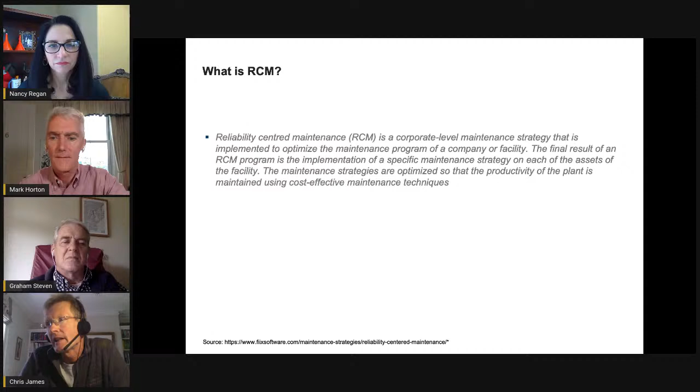This is something I got, not from the standard, but from Google. When I typed in 'what is reliability-centered maintenance,' this came up very high on the list, and I shall read it to you now. Reliability-centered maintenance is a corporate level maintenance strategy that is implemented to optimize the maintenance program of a company or facility. The final result of an RCM program is the implementation of a specific maintenance strategy on each of the assets of the facility. The maintenance strategies are optimized so that the productivity of the plant is maintained using cost-effective maintenance techniques.

Now, I would actually have a problem with that, because in my view, anybody that reads that statement would be forgiven for thinking that RCM is just about maintenance, because it seems to just talk about maintenance. The point I'd like to make in this session is that RCM, of course, it is about maintenance, but it's about more than maintenance. It's not just about maintenance. And if you just look at it as a program for deciding what maintenance to do, you're missing a whole load of things.

So I'm going to start with a bit of theory from the late, great John Moubray, and then I'm going to go on to a few examples, and I'm sure other members of the committee will have lots of other examples they will add as well.

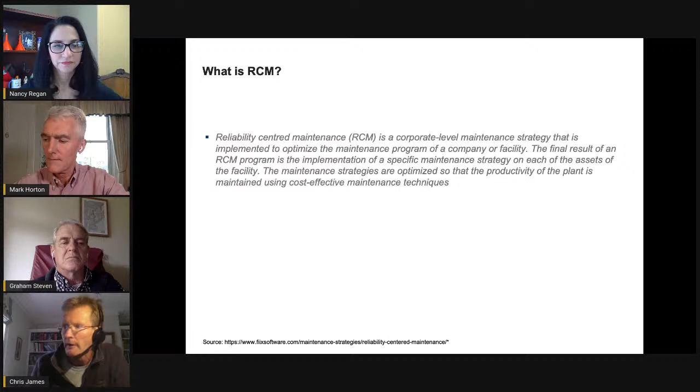Moubray tells us that any asset has two standards of performance: what the asset can do, its initial capability, and what we want the asset to do, its desired performance. Maintenance can only raise the performance of the asset up to its initial capability. So if you've got an asset for which the want is above the can, it will be in a failed state, and maintenance will often have to pick up the pieces to deal with those failures. But fundamentally, no amount of maintenance is going to increase the performance of the asset beyond what it was initially capable of doing.

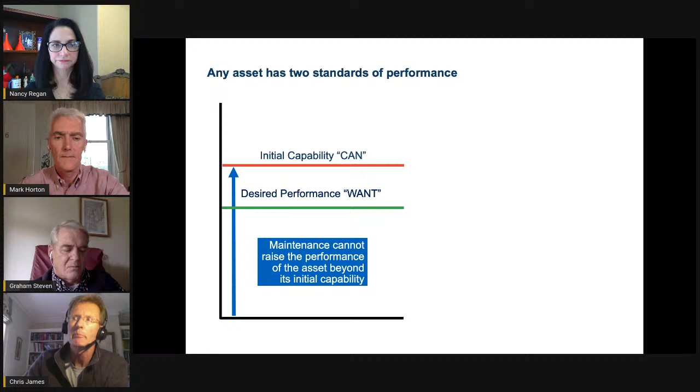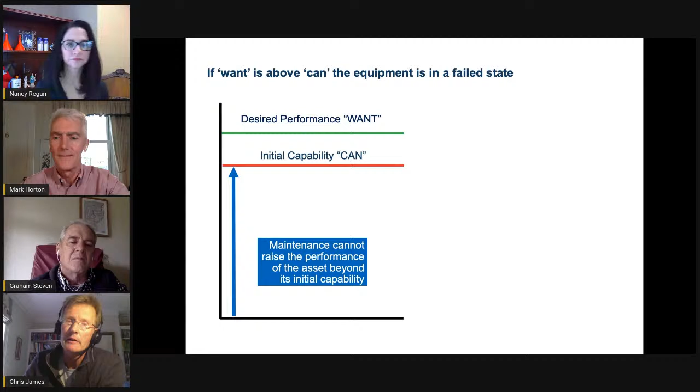So the definition of a failed state is when the want is above the can, when the desired performance is above the initial capability. It's a very simple model, actually a little bit embarrassing, a little bit insulting that you come along and listen to me tell you something this blatantly obvious. But it's actually a very powerful model because it's a good way of understanding and considering the different ways that things can get into a failed state.

A few more points I'd like to make about this model: there's a lot of pressure pushing the cans down. Moubray said you should have a gap between the can and the want, which he called the zone of maintainability. There's a lot of pressure pushing the can down, particularly at the design stage. Everybody wants to save some money, everybody's under great pressure of time, everybody wants to value engineer, don't they? Consequently, quite often the capability of the equipment in lots of different ways is being pushed down.

And there's also a lot of pressure pushing the want up, particularly later on during operations—we always want a little bit more from the asset. We're not just talking about absolute performance of an asset; we may be talking about things like accuracy or tolerances or the environment in which the equipment operates. But often we want more, don't we? And operations want more.

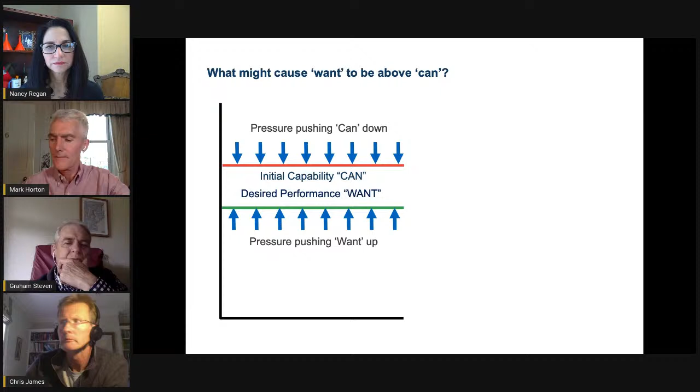Another point to bear in mind is that we're not just talking about performance standards in terms of absolute performance of the whole asset. We've got cans and wants all over the place—for the asset as a whole, for systems and subsystems and components in the equipment as well. And we've got it for all sorts of different parameters depending on the context: it could be absolute performance, or tolerances, or the environment in which something operates.

If you think about how equipment comes into being, the design process—quite often designers do a very good job, but even at the design stage, things are sometimes a bit suboptimal. Everybody is under great pressure to do things quickly, to get their job done and move on, and to save time and cost. Often things aren't well communicated—you've got different entities, different organizations doing different parts of the design process, not always well communicated, not always well documented, and of course things can change.

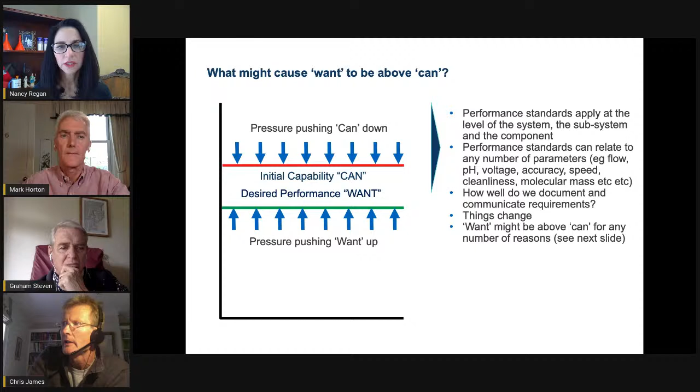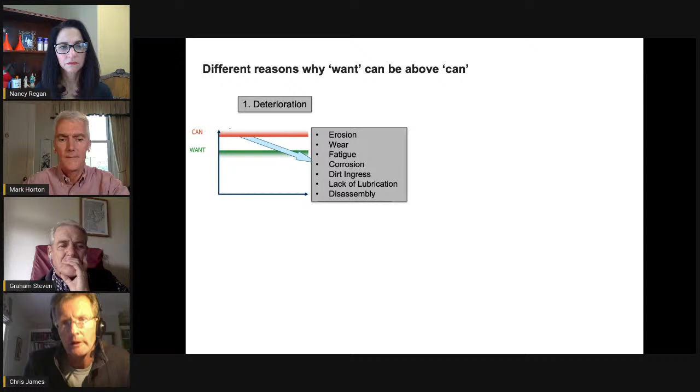If we think about it in these terms, you can understand the different ways that something can get into a failed state. There are perhaps four categories of reasons why want can be above can, why equipment can be in a failed state. The first category would be the well-known mechanisms of deterioration—things like erosion, fatigue, corrosion, lack of lubrication, build-up of dirt or disassembly—things that cause the capability of an asset to fall below what we want it to do, which causes it to be in a failed state.

But that is not all, because things can also change, and we might want more from the asset, or want it to work more accurately or in a different environment—in other words, situations in which the want can rise above the can. Maybe this happens deliberately—we deliberately push the equipment beyond what it was originally intended to do—or maybe it happens unintentionally at times, we don't really realize, or maybe conditions simply change.

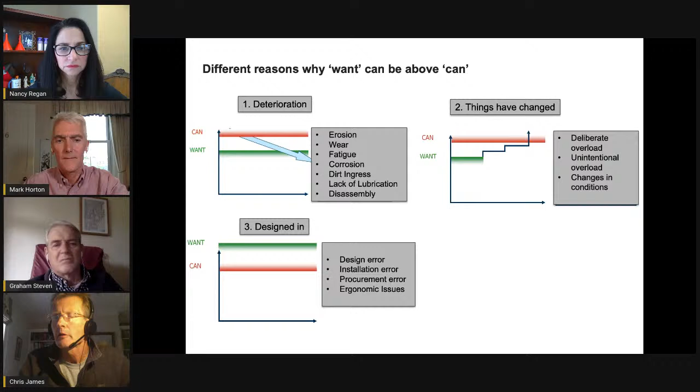And then there's another category of failures, which are those where the equipment hasn't really been fit for purpose right from the beginning, perhaps because of design, perhaps because of the way it was installed, or perhaps because of procurement issues, where want is above the can right from the beginning.

And then we have a fourth category of failures, perhaps, that may cause the can to fall below the want because of the things that people do. Because any equipment really doesn't operate in isolation, does it? It's part of a wider system that often includes people, including operations and maintenance.

And do operators always operate the equipment in the same way? Do maintainers always do their work in the same way? Are those procedures always well defined? Are they precise? Are they clear enough? Do people have the competence to do all the things that they're supposed to do, etc.?

There's a whole bunch of reasons why things can fail because of the things that people can do, that can cause failure. And I don't know about you, but in my experience of looking at failures over the past 30-odd years, I've seen all of these. I've got some examples coming up, but in my view, things can fail for all of these reasons in virtually all cases.

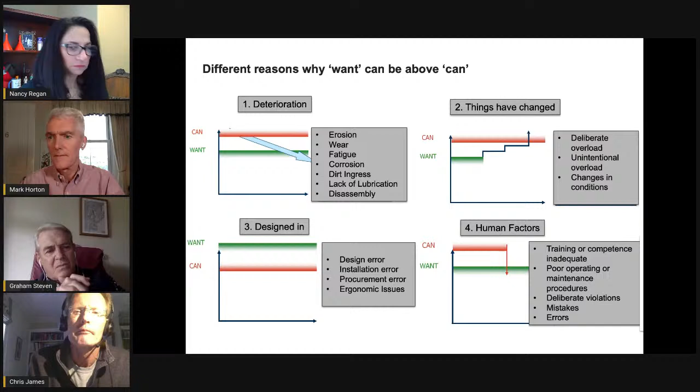And if we follow this through into what you should do about it, if we've got deterioration, you can manage deterioration through maintenance. Moubray said that maintenance is about putting energy into a system to keep the can above the want. Which is fine.

But of course, if things have changed because of the way things are operated, maintenance may have to pick up the pieces. But no amount of maintenance fundamentally can solve that. We need then perhaps to look at the way we're operating the equipment, or perhaps go back to the design to do something, to change something which is not maintenance, to improve the capability of the equipment.

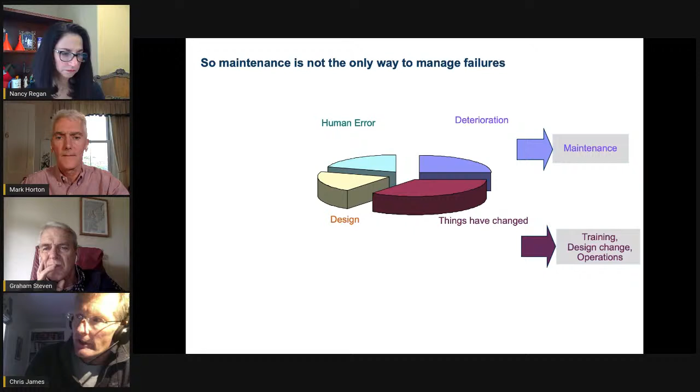And then if we've got a design flaw from the beginning, obviously the thing we need to do is improve that. And if we have human factors that can cause failure, then the way to deal with these is to look at the way we operate and maintain the equipment, and maybe look at the procedures and the training within which people work. And maybe also sometimes we can also consider the design.

I think the Japanese call it poka-yoke, the design of equipment to minimize the risk of human error. So for these different causes of failures, we have different outputs, and they are clearly not just about maintenance, is it?

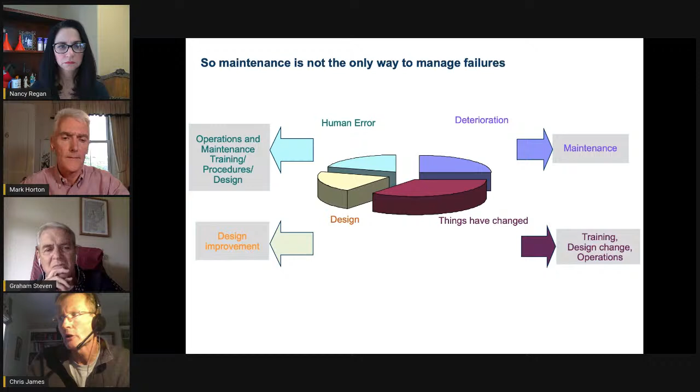And so, really, from a theoretical point of view, reliability is not just about maintenance. Maintenance has got a big part to play in reliability, but reliability is not just about maintenance. And actually, I do remember John Moubray saying that in some ways the M in RCM is a little bit of a handicap, because it does suggest, and some people may believe, that RCM is about reliability-centered maintenance, whereas I would prefer to say, well, perhaps we should be putting more emphasis on the R, which is the reliability bit.

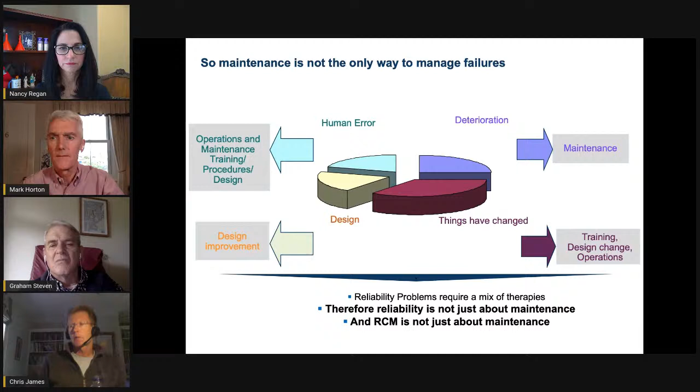So moving on now to some examples. I worked for a while for a large consulting company. And a big thing about what we did was the big presentation at the end. And I did lots of RCM studies for this company.

And one thing that I was always asked to do for these presentations at the end was to count up the number of tasks, the number of recommendations. And I always sort of objected to this a little bit. I couldn't really see the value of doing so, but there was a little bit of value.

And so this is quite a large study that I did, and a typical sort of set of recommendations. So from this particular study, there were 178 recommendations. It's quite, you know, moving down the list here. It's quite valid, of course, under the right circumstances for some failure modes to have a strategy of no scheduled maintenance. That's perfectly valid under the right circumstances.

When it comes to proactive maintenance, there was a bunch of proactive maintenance, cyclic maintenance tasks, and the vast majority of those are condition-based maintenance, because as we know, RCM favors condition-based maintenance. But there's also a number of scheduled traditional PM, scheduled restorations and overhauls, and a number of failure finding tasks. And the number of failure finding tasks might obviously be influenced by the nature of the asset, the number of instruments you've got, and how much maintenance you need to do on those.

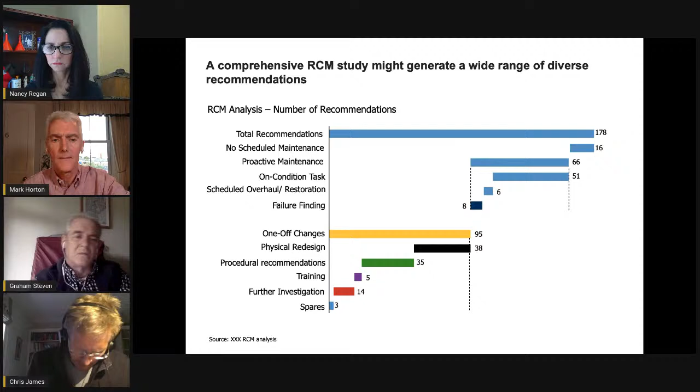Now, this particular client, it was a big project that we were doing, and they had another RCM consultant on site, and we were given their analysis to review. So we didn't obtain this unethically, we didn't obtain it through subterfuge. We were given it by the client, and they asked us for our comments.

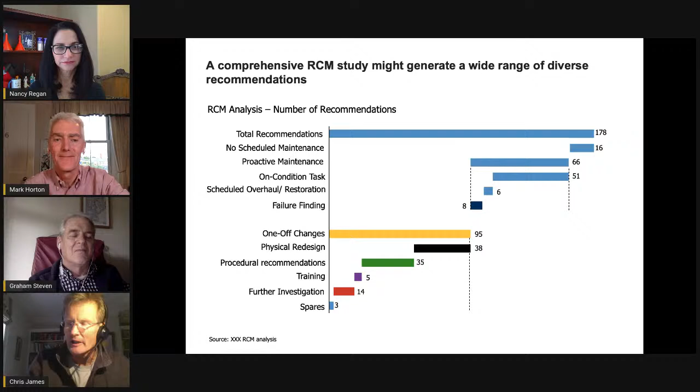Now, this particular study was a similar exercise that was done on a competitor's analysis. This person, who shall remain nameless, was very active and is still active in the RCM market. You see, they've been doing it a long time, and you still see this person operating and selling the services.

But that's another issue. So this was proof to me that there are lots of people out there that believe that RCM is just about maintenance, because this was a consultant selling RCM services that had come up with something like this. Okay, so I'm going to move on now to a few examples.

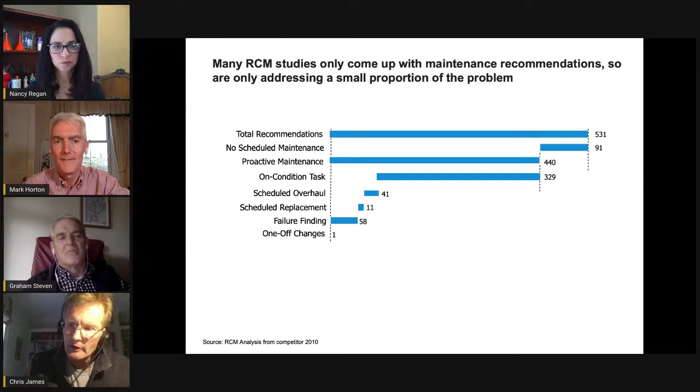I could give you three examples from different industries. So this is one that I did in aluminium recycling. I think you call it aluminum, don't you, in the US? But this is aluminium recycling.

So this particular plant in the north of England, what they did is they took a few million used beer cans, typical output from a weekend from a city in the north of England. They took a few million beer cans, and they melted them down to create these slabs of aluminium for recycling purposes.

In an aluminium furnace, they had a pump that was used in the bottom of the furnace to circulate the molten aluminium. And the pump was unreliable. The sister plant in Germany had a much more reliable pump. And I went in as a consultant to try and help them use RCM to improve the reliability.

What was interesting is that virtually all of the failure modes for that particular study were about things that could not be addressed by cyclic maintenance. They're about process, procedures, and practices.

So, for example, the operators actually cleaned the pumps using rods, and they did so too late because the pumps got slag built up on them. They did so too late, and they did so too aggressively, and they damaged the pumps.

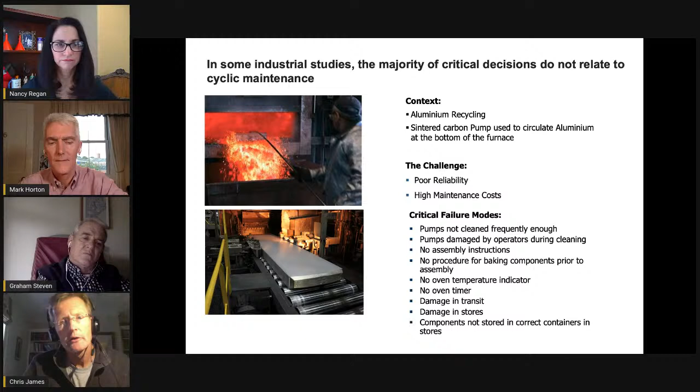So another example, this is from the oil industry. This is a centrifugal compressor compressing gas that went into a power station, and the power station tripped due to lack of gas a few times. It was actually politically charged because the minister owned the power company and he wanted to know what was going on. So it was a very high pressure analysis, and we came out with lots of recommendations.

But one of the key recommendations was actually about operator procedure. And when I did these studies, I also had a consultant with me, a bright young consultant who was able to go along and do some data analysis and speak to people to feed back information that would reinforce the RCM study. So it was very, very useful.

What he did is he looked at the performance of different shifts, and different shifts had different success rates at starting up and at dealing with trips. The fact that different shifts performed in different ways shows that there was good practice and there was bad practice. And that's an opportunity, is it not, for identifying good practice and spreading good practice.

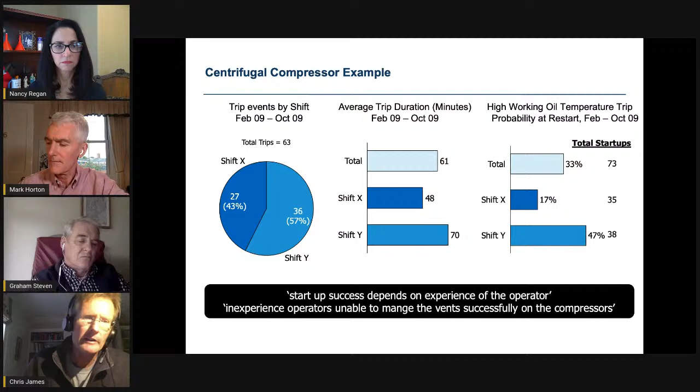And the final example I would give is again from the oil industry. This was a deep water disposal pump, and this was actually quite an old oil well that had a high water cut. So for every part of oil that was produced, 4 parts of water were produced.

And unfortunately, it wasn't nice, clean water. It was dirty and saline, and you couldn't just dispose of it easily. It needed to be disposed of, and the way that they disposed of the water was they pumped it back under the ground in these deep water disposal pumps. If they couldn't get rid of the water, they had to stop producing oil because it was needed to be disposed of underground. And they had problems of reliability, and it was quite a big analysis.

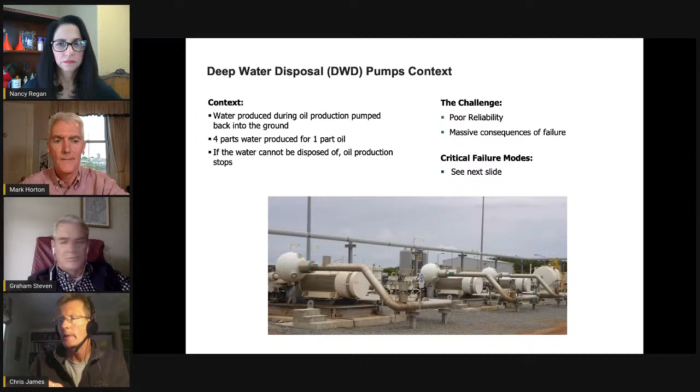It included all the systems around the pump, but what was very interesting to me about this was the number and breadth of the recommendations about things that were not just about cyclic maintenance. I've color coded them according to some of those different categories, but we've got here some issues of design, training, procedures and competence, and also of operating parameters. And I think it's quite clear, if you want to do a proper analysis, you need to know what really happens.

You couldn't go making these sorts of things up. And in order to do a proper RCM analysis, you really need to have the people that know the asset best, who know what really happens. And also you need to do this in an environment that's non-adversarial. It's not about pointing fingers, but if you can get the right people who speak freely, quite often there's a lot of very valuable information that all contributes to improving the reliability.

But in this situation, there are issues of competence, there are issues of maintainability, issues of design that cause risk or that cause vulnerability.

There were components that weren't on the system - quite a small thing, but it can contribute to the levels of risk. And there's a tendency, perhaps because of this thing about the wrong springs, for people to be tempted to use the wrong springs, with the reliability impact that could have downstream.

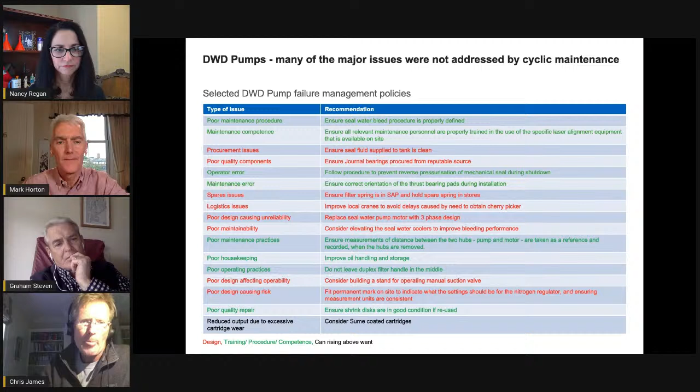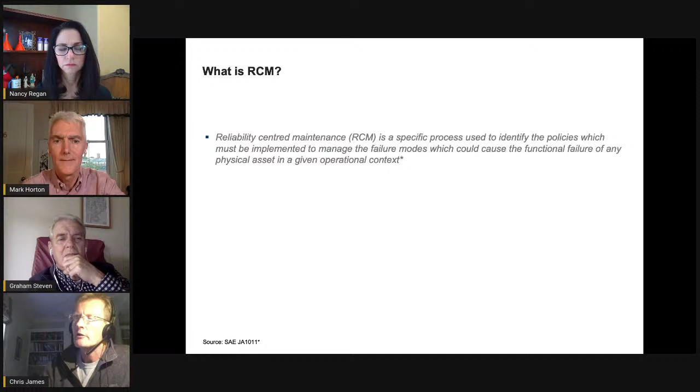This is the definition of RCM from the SAE standard. What the SAE standard says is that reliability-centered maintenance is a specific process used to identify the policies which must be implemented to manage the failure modes which could cause the functional failure of any physical asset in a given operational context. It also goes on to say that the failure modes should include any event or process that is likely to cause a functional failure, including design defects and human errors caused by operators and maintainers - unless these events are sufficiently addressed by processes apart from RCM.

So maybe in some environments like aviation, they just focus on maintenance in RCM because they've got other processes that are looking at design and human factors. But some important words there from the SAE standard.

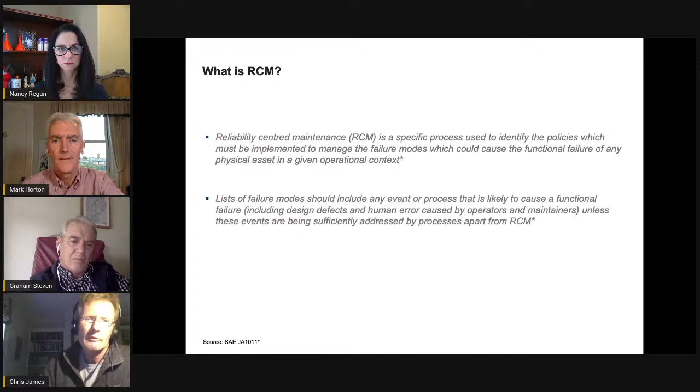The final slide I have here is actually a quote from the original Nowlan and Heap report, just to reinforce this: for most complex items, there is no form of scheduled maintenance that can safeguard operational reliability, no matter how often or how intensively it is performed. So in other words, it's not just about maintenance.

So food for thought, hopefully. I don't know if any of you agree or disagree - it'd be good to hear from you. Thank you very much.

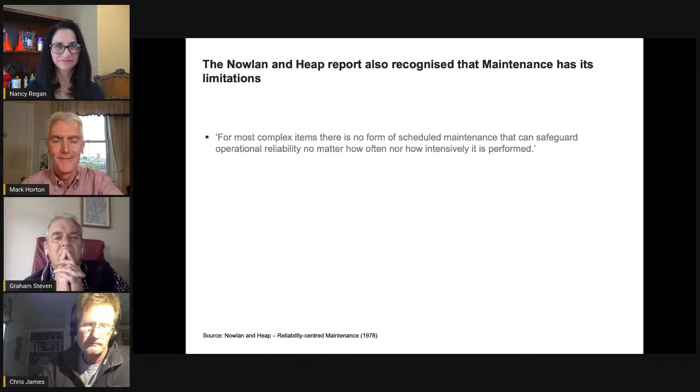Chris, that was an incredible presentation, it's so eye-opening. And when you first started to talk, you said that when you were talking about can versus want, that it's a blatantly obvious topic, and it is, right? But I will echo what you said - in my experience with analyses that I've facilitated, I've found similar results.

And what I think is, it's such an obvious topic, it's such a simple concept that it's often overlooked, because in our industry - really in any industry - as human beings, I think we often look for the complex, and so the simple is often overlooked. And I think that happens with want rising above can a lot, and that can be a cause of chronic failure. So people are all looking up here for why am I getting this chronic unreliability, where the answer could be right there under our noses.

One thing Moubray always said is that it's not always rocket science, it's often the simple things. The odd thing is, Chris, that sometimes people seem to know the answer already - they will tell you that they have. One example, really simple, was a bearing alignment problem. They knew their bearings were failing because of alignment, but they just didn't have the tools, and that was the complaint of the maintainers - they didn't have the tools to do it.